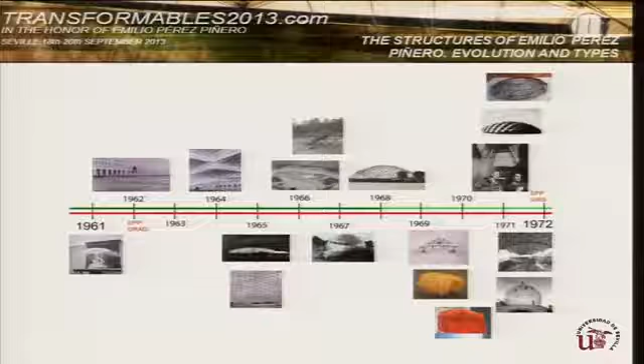As we can see in the timeline, we're talking about the works of Emilio Pérez Piñero. We must have in mind that the architect only worked for 10 years. He died when he was only 36 years old. His designs were brilliant and visionary, and his solutions were always innovative and effective. His promising career was sadly cut by a tragic car accident.

Nobody knows what he could have accomplished if his life had been longer, but his legacy lives on, as evidenced by the organization of this International Congress. During the next minutes, I will try to make you know about some particular aspects of Pérez Piñero's works.

First, it is needless to say that Pérez Piñero's working methods were quite original compared to those of other contemporary authors. He always worked alone. His team was formed by a small group of local artisans previously trained by him to work with the necessary precision. Pérez Piñero did not confine himself to merely utopian designs on paper, preferring to develop them by means of applied solutions. He always built test models made out of the same materials which would be used later in real structures.

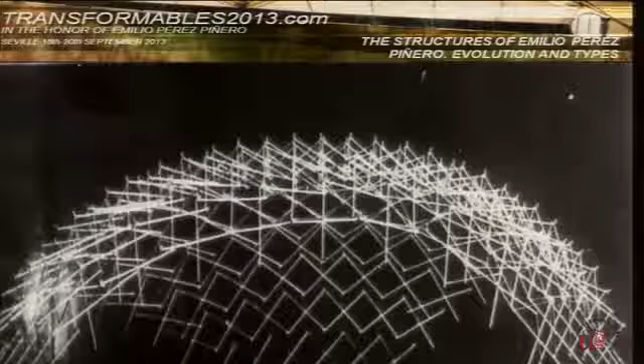Pérez Piñero worked mainly with two types of structures. Modular structures. In this slide, we can see a module being installed in the structure. We have the module, and here is the structure being constructed. And deployable structures. In this slide, we can see the first deployable structure made by Pérez Piñero.

In my opinion, the best method to analyze and understand Pérez Piñero's works is to consider the basic components of his structures, namely the nodes and the rods. Now let's talk about the nodes. In Pérez Piñero's modular structures, we can consider two types of 6 millimeter thick nodes.

The closed node is on the left of the slide. On the slide, we can see the closed node and the open node. The open node is on the right of the slide. I don't know if you can see the letters because the seat is too high.

In the two cases of the nodes, they are connecting different modules in a modular structure. With them, we can cover spans of more than 30 meters, with only 6 millimeters thick.

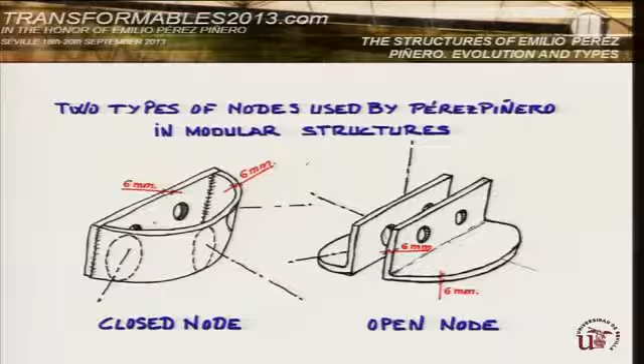On the other hand, when we speak about deployable structures, Pérez Piñero used basically two types of nodes. First, the 3-rod node is composed of a core. You can see here the core, with 3 studs lying within the same plane, forming angles of 120 degrees between each. In this node, the 3 bars meet and articulate, as you can see on the right of the slide.

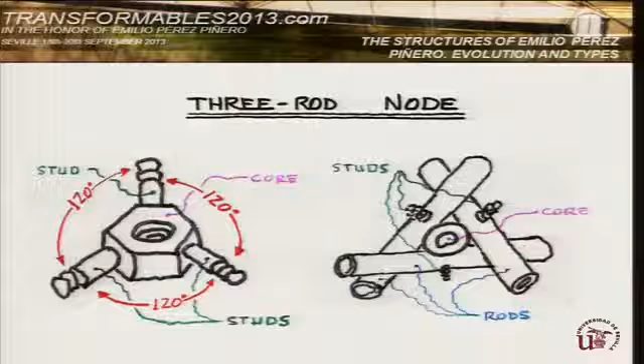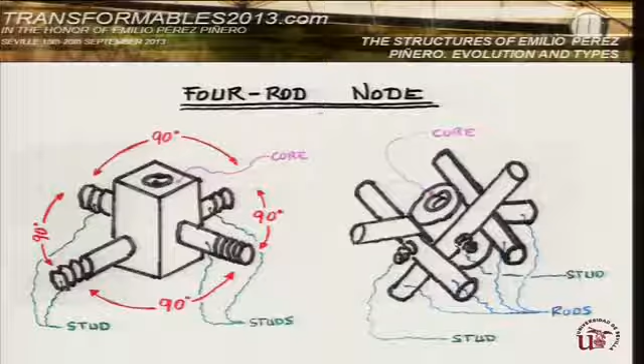Secondly, in the 4-rod node, 4 rods meet and articulate. This node is composed of a core with 4 studs lying within the same plane, forming, in this case, 90-degree angles between each. And now, let me talk about the rods.

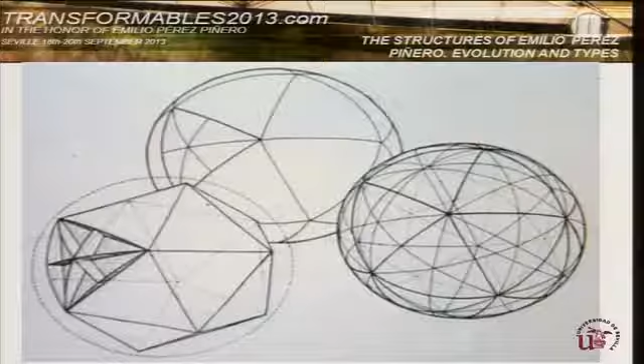When we speak of the rods, it is important to note that in the case of modular structures, Pérez Piñero worked mainly with the polyhedral decomposition of the sphere, based on the spherical icosahedron as Fuller did. However, Pérez Piñero greatly simplified the dome assembly, grouping the rods together in pentagonal and hexagonal parts.

As in nodes, when we speak of deployable structures, there are 2 types of rods. The 3-node rod. In the slide, you can see the 2 types of 3-node rod. On the left, we have the 3-node rod with 3 nodes of 3 studs. And on the right of the slide, we can see the 3-node rod with 3 nodes of 4 studs: 1, 2, 3, 4 studs.

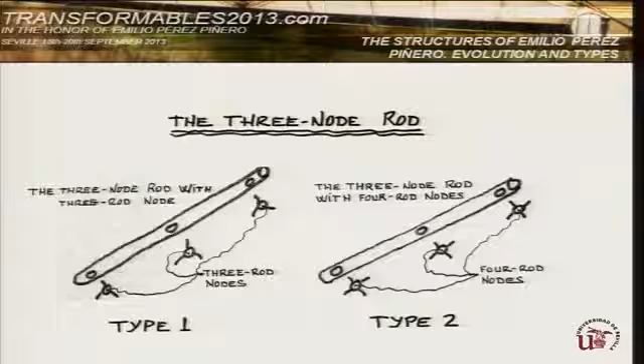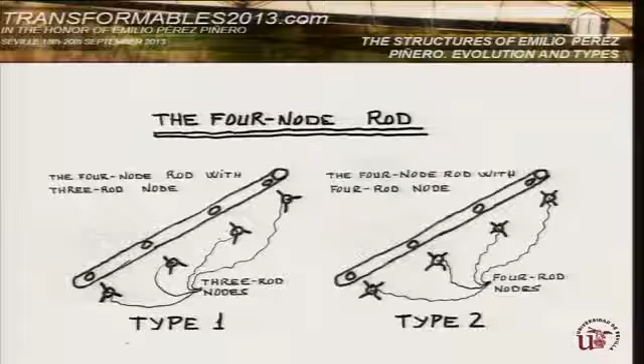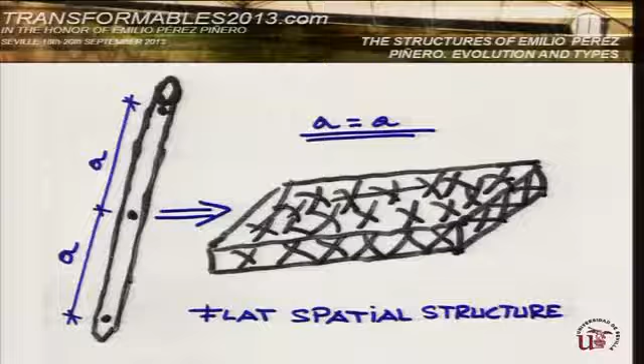When using 3-node rods, if the central node is at the middle of the rod, that is to say, at the same distance from the end nodes, flat spatial structures are obtained. You can see now the slides. If the central node is not at the same distance, being the distance b from an end node longer than the distance a to the other end node, we obtain a curved spatial structure. The curvature is proportional to the difference in length between the 2 half bars.

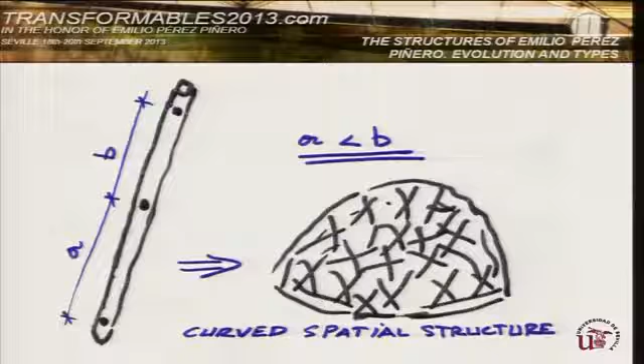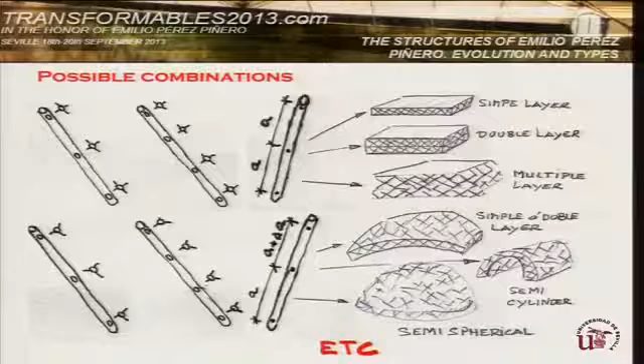If we combine the above 2 types of nodes with these 2 types of bars and play with the lengths of the half rods, we get a very complex variety of types. Unfortunately, we have no time to describe them all. In the slide, you can see some possible combinations. Let's now have a look at some examples of the structures designed by Pérez Piñero, where we can see their evolution in time.

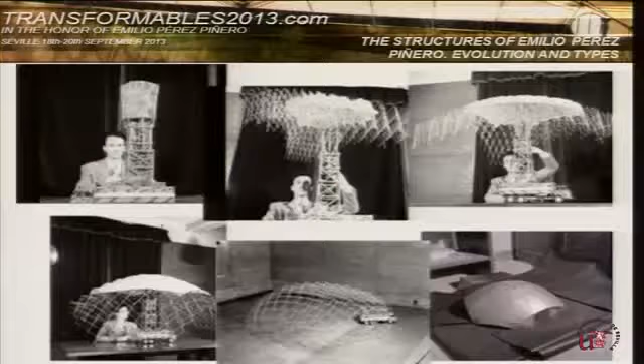In 1961, Pérez Piñero won the International Union of Architects London Congress award with his traveling theatre. As shown in the sequence of photographs, the folded structure is transported on a truck as a compact package. When the truck is placed in the target area, the structure is deployed by means of a telescopic tower. The theatre is then ready to use, since the fabric roof needed to cover it is included in the pack, folding and unfolding together with it.

In September 1961, Pérez Piñero improved the design of the structure, including the necessary stiffening elements in the deployable compact package. They consisted of two groups of wires placed on the outer and the inner faces of the dome. The wires will or will not work depending on the sign of the bending moment happening at each section of the dome.

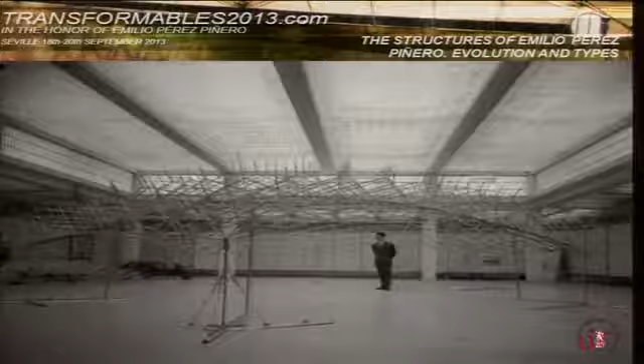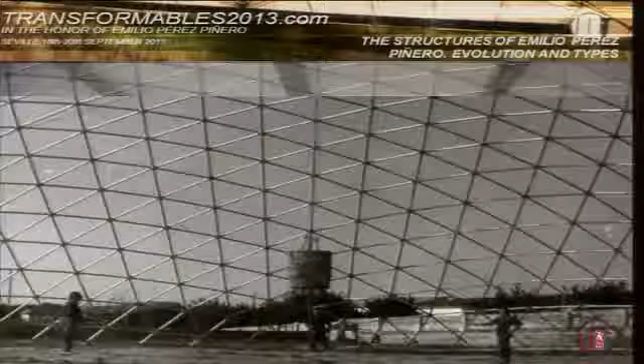The scale model you can see in the slide was produced in considerable dimensions so that the structure's behavior could be properly studied and later applied to a life-size case. This model was also used 3 years later for testing the deployment of a transportable dome from a helicopter. The compact package of rods flies hanging from a helicopter, attached by 5 nodes placed on the grid's inner face.

When the structure arrives at its final location, the fastening belt, which prevents the folded rods from deploying, is released while the helicopter lifts the structure up in the air. The structure can therefore be automatically deployed and stiffened in the right place. When the time comes to move it somewhere else, the structure is hung from 5 nodes belonging to the external face of the dome, and the helicopter has just to pull up again to automatically fold the grid, which is now ready to be airborne to a new location.

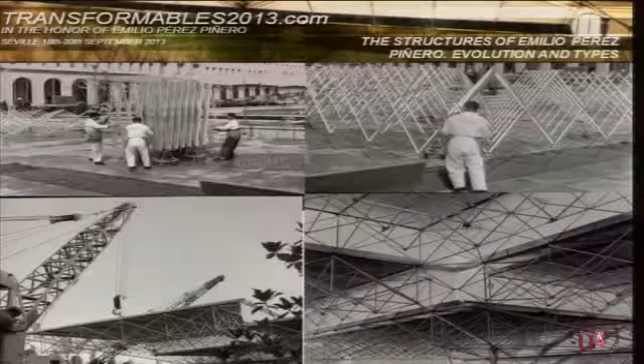In January 1964, Pérez Piñero built the transportable pavilion for the exhibition 25 Years of Peace. As we can see in this slide, in this case, the architect decided to build a new flat deployable structure totally made of aluminum. For this purpose, he designed the previously seen 4-rod node. A hybrid system, including compressed parts on the outer face of the truss and wires on its inner face, was used in order to stiffen the whole structure.

Prefabricated molded aluminum plates were used to cover it. The pavilion had a total surface of 8,000 square meters, divided into 12 by 9 meters flat and folded modules. It was designed, manufactured, assembled in only 3 months.

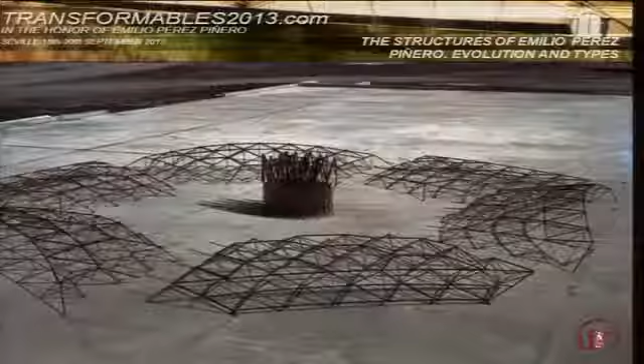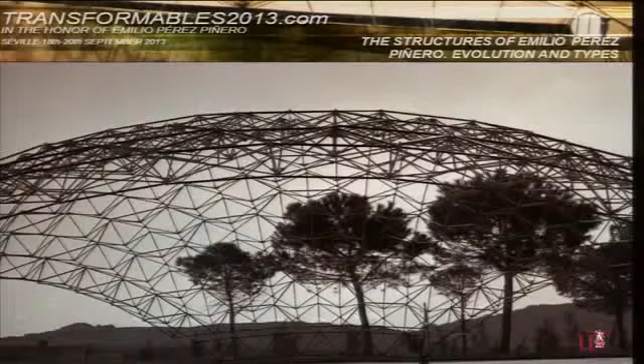During these hectic years, in which the architect developed many new projects, he kept on improving the old types of deployable structures designed to date. As a consequence, he came up with a new challenge: to find a solution to the hypothetical case in which a very big dome could not be handled and transported in a single package. This new challenge will result in the deployable reticulated dome for large spans. The whole structure was prefabricated in 7 modules. You can see the 7 modules, which had to be deployed and stiffened on the ground, and then lifted up and locked together in order to close the dome.

Excuse me. At the beginning of 1969, he received a letter from the U.S. Navy. In the letter, the Navy expressed its interest in his patents in order to design a fast assembly pavilion, which should be later set up in Antarctica. Pérez Piñero's response to this new challenge was the design of an automatically unfolding tent built on a hexagonal base. Aided by a metal spring, the tent would unfold automatically, making the task of the assemblers easier.

As usual, the fabric cover folded together with the structure, which in this particular case should also be able to bear extreme weather conditions. It was an X-shaped system which will be the most used by later authors. The tent could easily reach significant dimensions with a completely unobstructed interior, which had the form of a hexagonal base prism and was around 4 meters height. The covering structure was very simple, topped by the vertical element which hosted the opening spring. We can see the spring on the top of the structure.

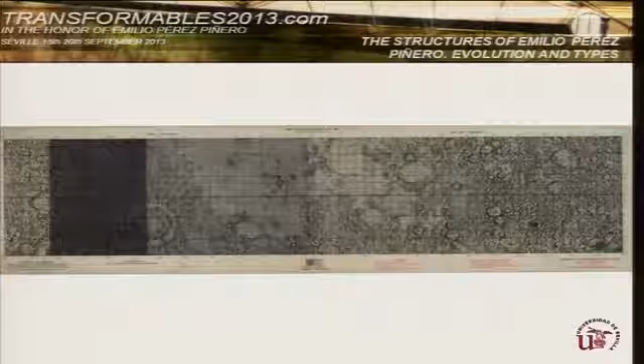In November of that year, NASA contacted Pérez Piñero, asking him to assist the possibility of setting up a greenhouse on the moon in order to create an artificial atmosphere inside. In this slide, you can see the photograph of the moon which NASA sent to Pérez Piñero through Candela.

As a result of this demand, Pérez Piñero designed a new type of folding spherical structure based on his folding reticular dome for large spans. However, some improvements were added to the external face of the structure, which was thicker and opened automatically by means of a system of springs, not needing any human intervention. In the slide, you can see the springs which allow it to open automatically.

The structure was to be transported in the nose of the lunar module. Once the landing on the moon had taken place, the dome would automatically open, installing the greenhouse on the surface. Obviously, the plastic cover folded together with the prefabricated structure. In this slide, we can see what the dream of Pérez Piñero could have been.

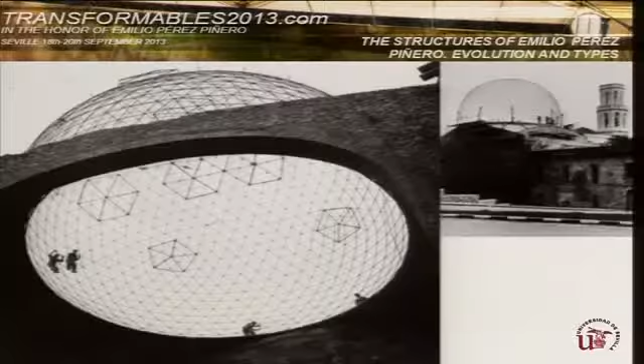That year, Pérez Piñero was called by artist Salvador Dalí, who commissioned him to design and build a geodesic dome for his Figueras museum. According to Dalí's wishes, the architect started to design a stationary geodesic yet totally prefabricated dome. Pérez Piñero decided to design a dome composed of 2 parallel layers connected to each other by small radial metal parts, which would give a sense of unity to the whole structure.

For the inner layer, he used an inverted T-shaped rod section in order to properly accommodate the covering glasses. The external layer, built in a lower frequency, was mainly used to facilitate the cleaning and the maintenance of the inner layer. Despite the small dimensions of the dome, whose sphere diameter was about 14 meters, Pérez Piñero provided the project with some technical innovation, namely with the pendentives it was built on.

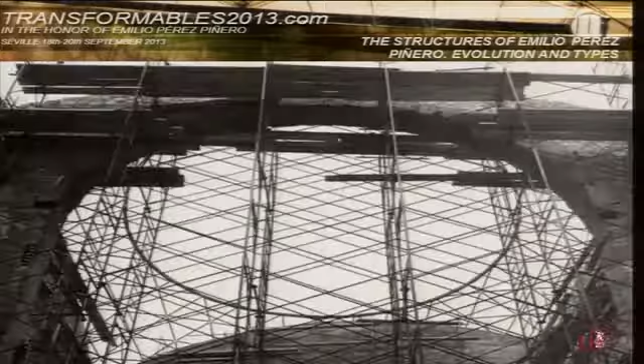These elements were solved by means of a slightly tilted geodesic dome segment, later covered with reinforced concrete. In the slide, you can see these pendentives. These are the pendentives. These elements transform the irregular ground plan into a circular ring on which the glass dome will later rest. This is the ring.

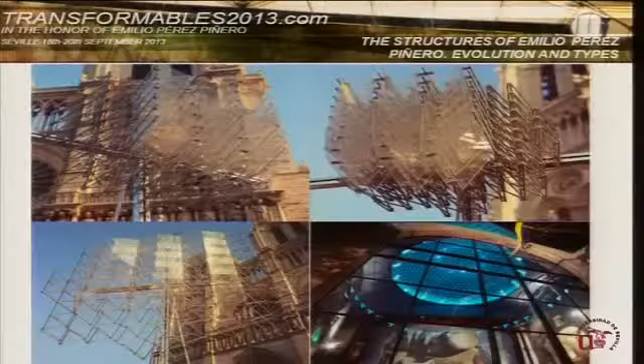Another consequence of the professional relationship between Salvador Dalí and Emilio Pérez Piñero was a new type of deployable structure called system of articulated planes covering a reticular deployable space frame. Originally, Dalí's purpose was to close the gap between the museum's courtyard and the dome-covered area. To achieve this task, Pérez Piñero turned to one of his old ideas, as Professor Pérez said before, when he worked on the designs of deployable antennas for artificial satellites.

The design consisted of a series of 1 square meter glasses attached to one of his flat deployable structures, so that all the glasses would integrally fold or unfold at the time the structure opened or closed. The operation may look simple, but it is actually a very smart way to package a plane.

The project was never accomplished due to the architect's early death. However, a scale model he gave to Dalí as a present is still exhibited in a chapel room at the Dalí Museum in Figueras. In 1992, we built a scale model to be exhibited in motion in the Murcia Pavilion at the World Expo 92 here in Sevilla.

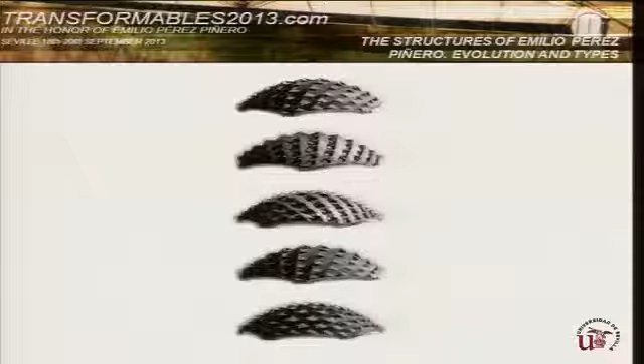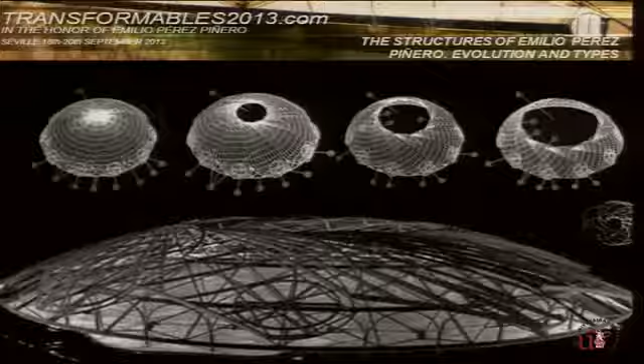Finally, in 1971, Pérez Piñero was commissioned to study the possible covering of the Campo Pequeño bullring in Lisbon, Portugal. As he used to do, instead of solving the structural problems by bringing back one of his old solutions, he came up with a brand new design which had nothing to do with what he had done before. The reticular dome is a spherical directrix structure which moves like a camera diaphragm.

Despite the apparent simplicity of the system, when studying it in depth, we are surprised by the complexity of its motion geometry. Pérez Piñero couldn't finish the job, but he left an almost completed scale model, which is now on display at the Emilio Pérez Piñero Foundation in Calasparra, along with the rest of the author's works.

Well, we have now arrived at the end of my presentation. I hope that I was able to provide you with a wider understanding of Pérez Piñero's works.